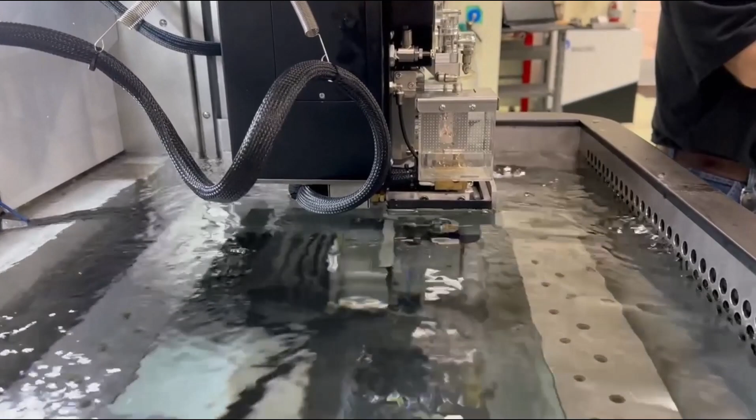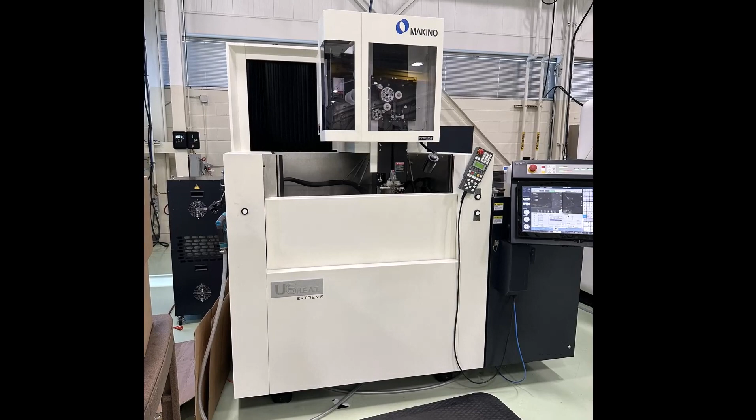As you'll see later in this video, there are many different Wire EDM machines, as well as Sinker and CNC machines offered by Makino. So let's start off with our VISI Wire, and we're going to be creating features first.

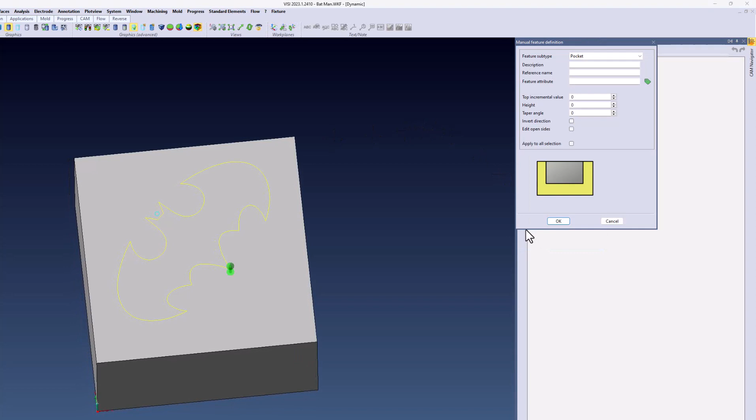There are multiple different ways to create features. The first way we're going to show is a manual-based feature. So we're going to create this as a standard feature here, pick our profile, and inside of this dialog we can choose whether this is going to be a pocket type of feature or a boss, to determine which side the wire is going to cut on. As you can see, we can extrude this down to the proper height it needs to be, and there's our feature.

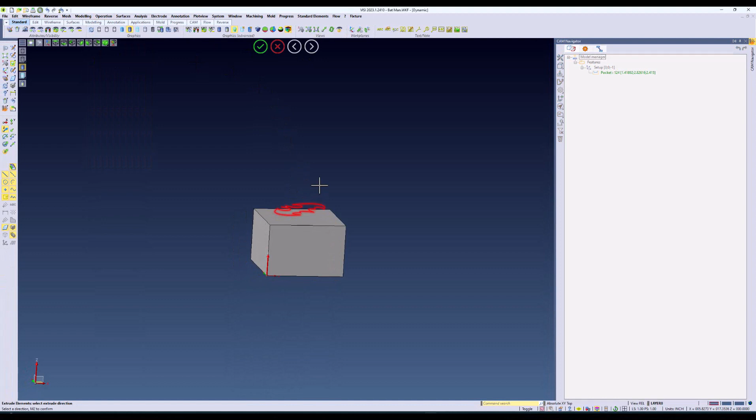A second way of being able to do this is by actually letting the system scan for it. I'm going to use some simple modeling commands to extrude that into our part, so it actually shows the actual part being cavitied out. Instead of a manual feature, we're going to let the system scan for that feature itself using recognition. With this, you can see how there's now a new pocket.

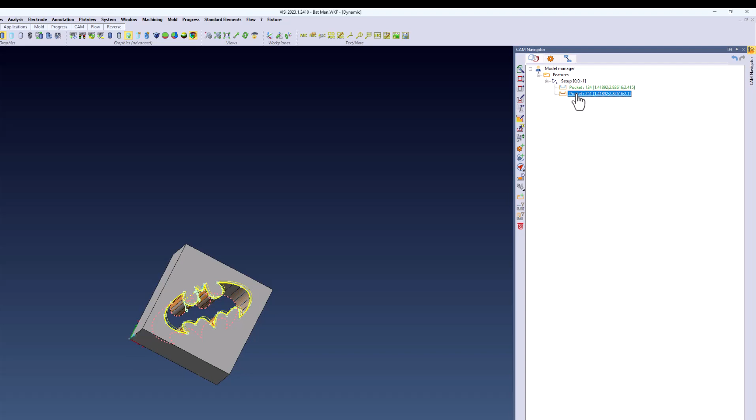From here, we're going to go ahead and add a wire operation. When we add a wire operation, we can select Add Operation and choose the operation itself. When we choose it, there are some very important things to choose.

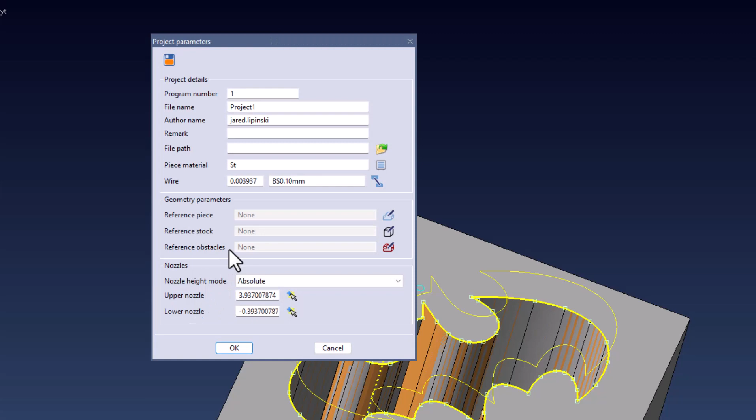As you can see, there are several types of manufacturers, which in this case we'll choose Makino. Inside of here, we choose the type of material, and then we choose the wire thickness. These are going to be important later when it comes to selecting technologies to be able to put in the correct electric levels and offsets for the machine.

Just to look at this, if you look at Makino specifically, you can see how there's hundreds of machines in here for different models, different versions, and it offers all kinds of different technology based on the machine that you select.

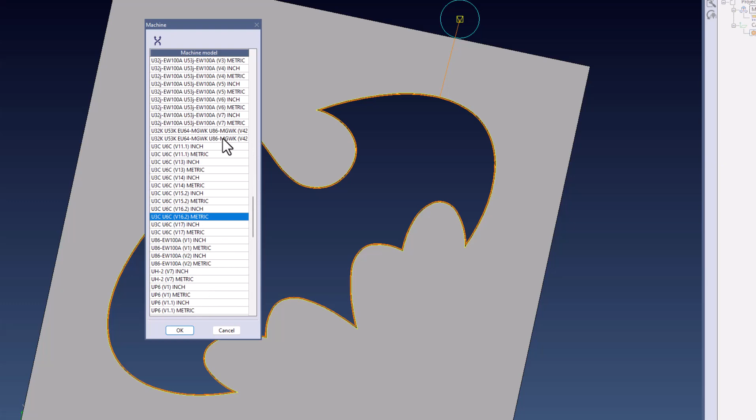So within here, let's start talking about our actual operation menus. You can choose within the cut methods whether you're doing clockwise or counterclockwise. You can choose the technology based on what we selected earlier, and it populates those electric values. You can see the generator values that the machine reads, and it gives you all kinds of different information.

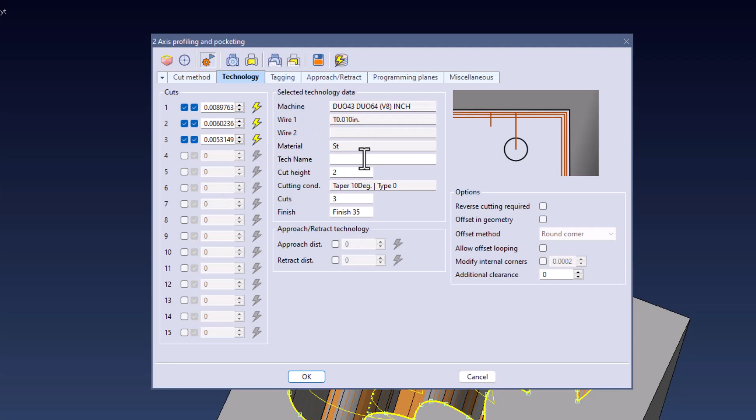If we did a 3-cut pass here, we could determine our tags—what's our tag distance, and when is it actually going to leave the tag in there. That's what this menu does. You can choose the distance the wire is going to lead on and lead off. Within programming planes, you could determine how high your nozzle is above and below the part, and under miscellaneous, you can add custom code.

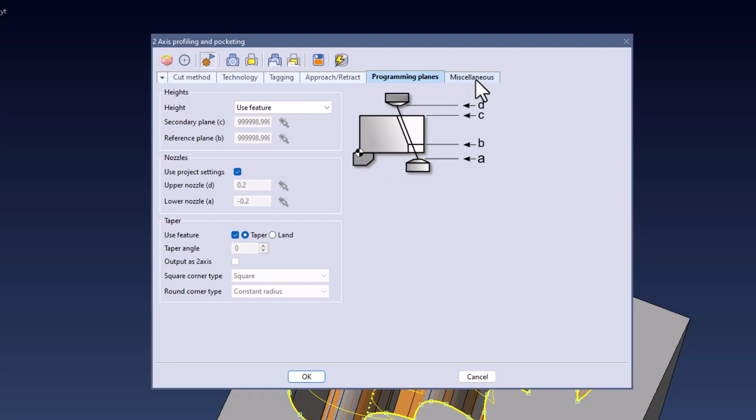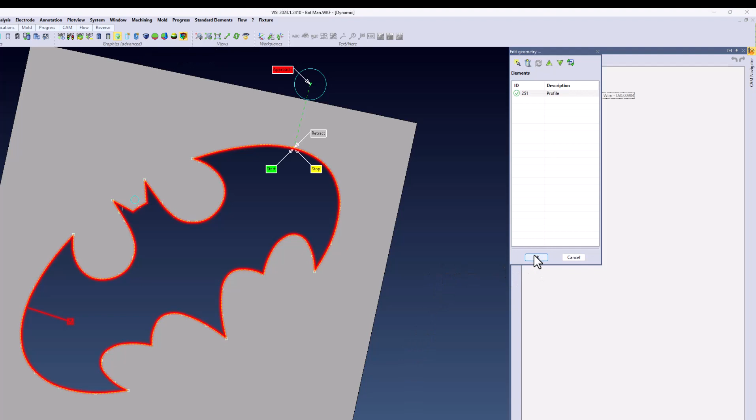So within our next dialog, we're going to change our approach point to that circle at the top part of the screen. If we go into here, we could right click and say Edit Geometry. Within Edit Geometry, we could change our approach, which automatically shifts your start, retract, and stop values to that area. So if I go ahead and build, it's going to change the start, approach, and retract points to that specific point area right there.

With that, we can then post out the program. It's very easy to post out a program within VISI, and you can sample the code that you're seeing that's actually going to be showing up at the machine.

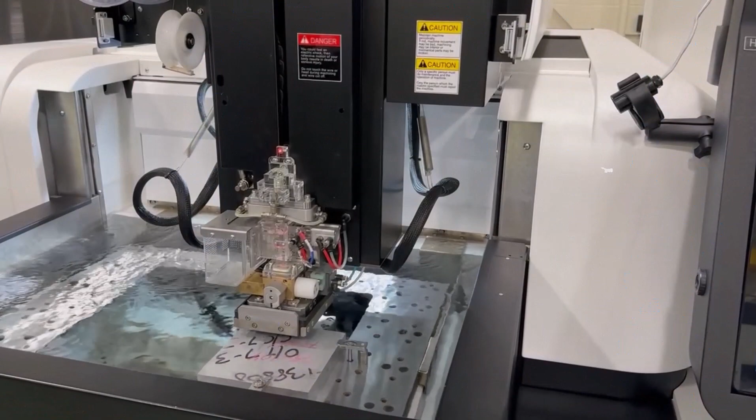As you can see, here's the same exact posted code at the Makino Wire EDM machine. So now we're going to start running the program from that. You can see how the actual machine interacts with the posted code from VISI, and you can see how it starts cutting the part.

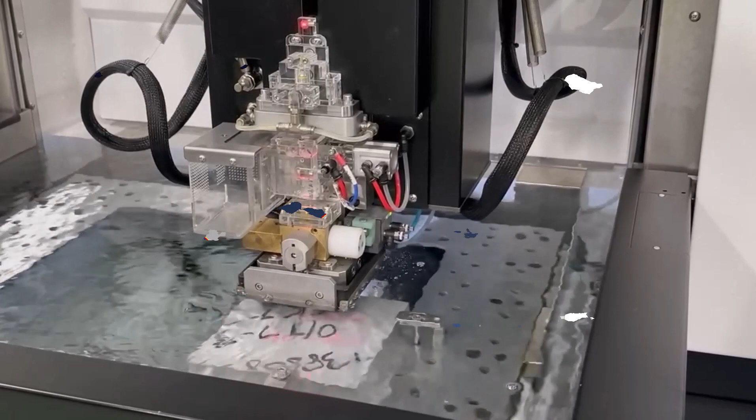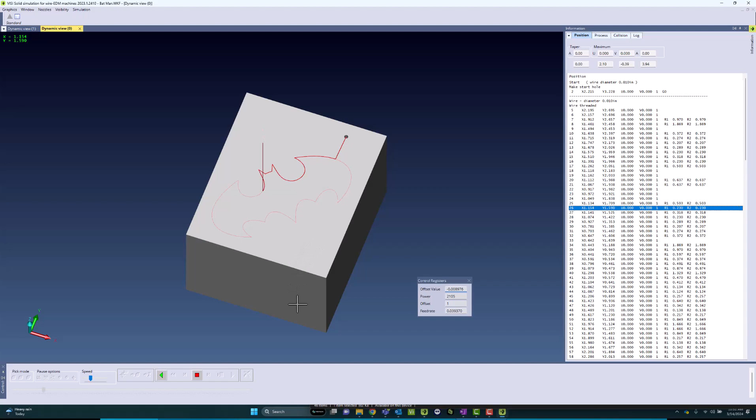Before the cutting process, we can also run a simulation through kinematics. If I hit OK, you can actually see what the wire burning is actually going to look like, so you can simulate the actual wire process. As you can see, it's showing you the actual XY movements on the right, and it's showing the wire process. If you look at the controller, which we're going to show here in just a second, you can see the same exact process that's going on.

This is actually while the program is running, showing where it's at in this current step, and you can see on the machine where it's actually running.

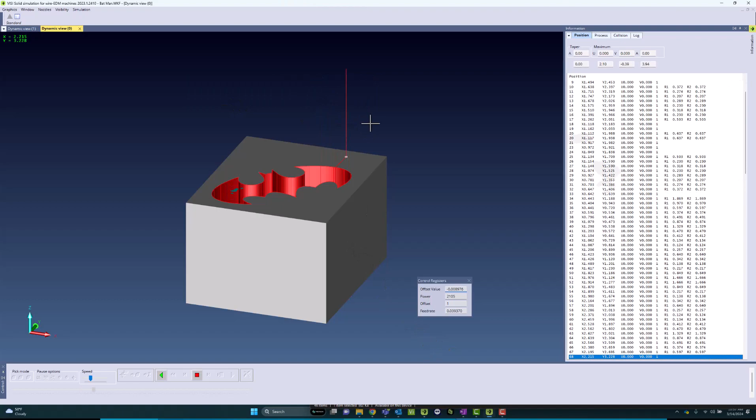So, finishing up the simulation, you can see exactly what is going to happen at the machine. We remove that slug out, and you can see the slug actually taken out.